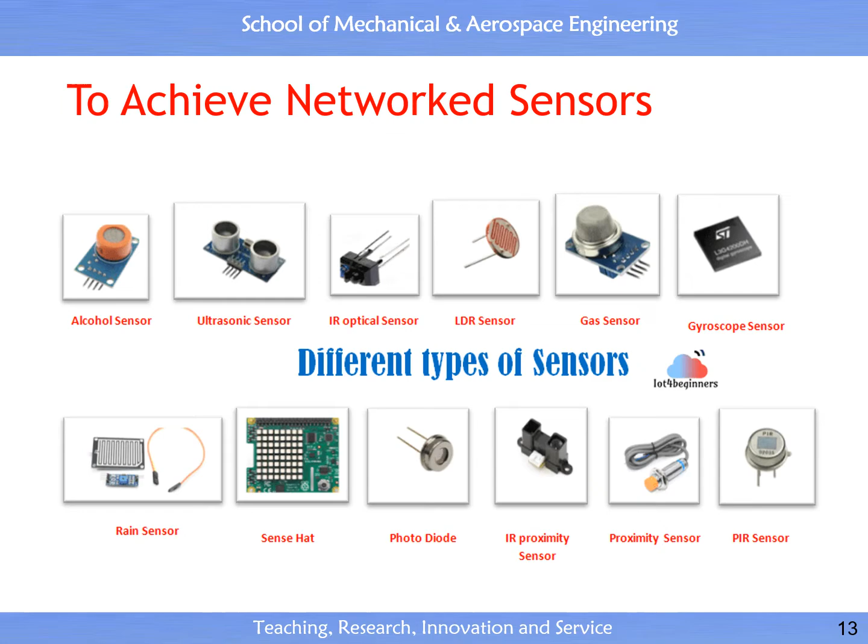There have been many revolutions, and now we're facing the next one: connectivity. But how can a company handle this? What does the industry of the future look like? Our experts have been wrestling with these questions for years. They know that the complete digitalization of the manufacturing industry plays a key role in the process. Why? That's simple. In the future, it will be more important than ever to operate quickly, flexibly, and cost-effectively.

Product life cycles are becoming increasingly shorter, while product variants are becoming progressively larger. Just like large volumes, small quantities must be produced economically. Lead times will become shorter, so delivery must become faster. For companies, this means that in the future, they must align their organization much more rigorously to meet customer needs. This can only be achieved if companies start today to digitize, automate, and above all, interconnect all processes, not only within the company, but also along the entire value chain.

This means a convergence of the various areas. Customers and business partners are part of the total process. The goal is to make all relevant data available anytime and be able to control the whole network of value creation in real time, from product planning and product and production development all the way up to production and logistics. Of course, data security must be assured at all times. Synchronizing digital and physical value streams not only increases productivity of companies, but also their efficiency, quality, and innovative capacity.

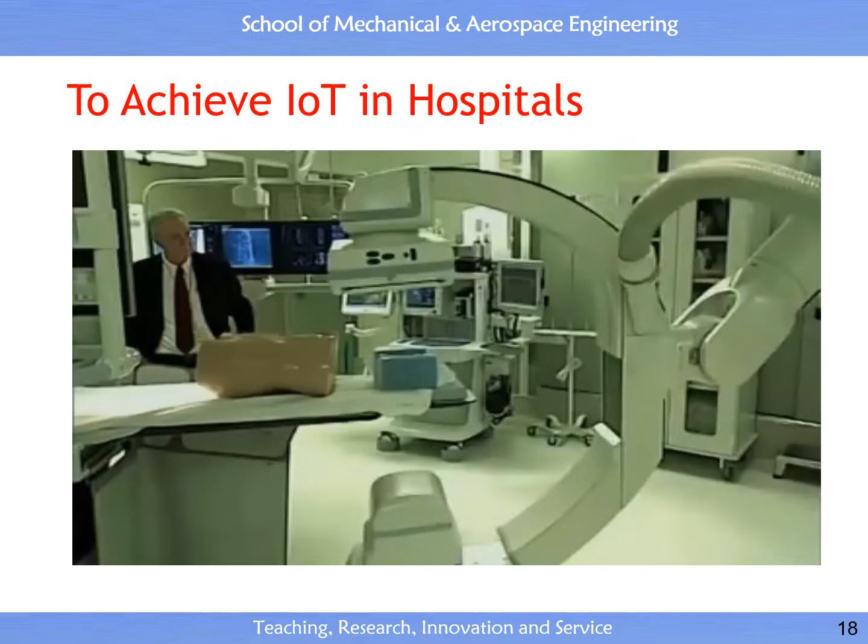We make no secret of the fact that we are determined to head right to the top of medicine. That's what we're doing - this is a beautiful example of it. I saw a machine that I'd seen 7 or 8 years ago in a lab building in Germany at Siemens, which was now a reality. And when somebody explained to me how it was going to be used, what more can you say?

We had this vision of what we thought the future of the operating room should be and what the future of surgery should be. Having an administration that was supportive of this vision, we were able to, with a lot of people's help, create these rooms, which are not only state-of-the-art operating rooms, but operating rooms of the future, where we're going to actually change what surgery is.

We're the first hospital in the country to have 2 of these units in the operating room. Just the whole concept of what is surgery, or what is needed to treat diseases, is changing.

We're going to redefine what a surgical specialist even is, because a surgical specialist now has to be an information technology expert. They have to be a radiologist, an endoscopist. They have to be able to do minimally invasive surgery. They've got to be able to do conventional surgery.

This revolution is really the merging of intervention with imaging—imaging equipment that allows us to be better surgeons and allows us to be minimally invasive surgeons. In this room, there are at least 12 different imaging devices so you can have multiple inputs.

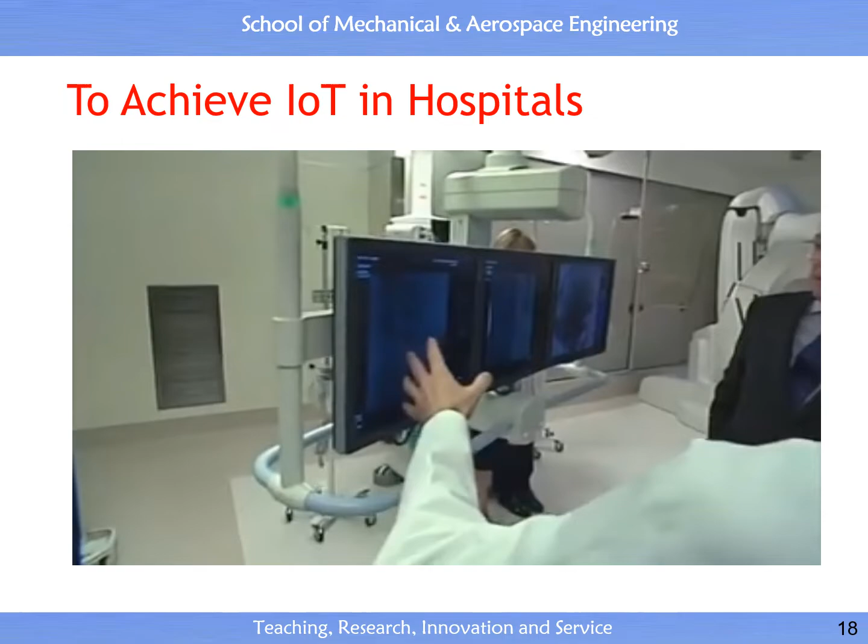You can always accomplish much more when you bring many minds from different disciplines together. That's really the exciting thing about being at an institution like New York Presbyterian. We couldn't have done this without the help of donors like the Helmsley Foundation, who helped mobilize the resources to build this kind of environment.

Basically, what this machine can do is take fluoroscopy and spin it around the patient to get a three-dimensional image. You can see blood vessels in 3 dimensions, solid tumors in 3 dimensions, and bone if you're putting in instrumentation and hardware.

By that spinning motion, you can also create cross-sectional images. So what you can start to do now is, say I'm going to operate on the intestine—this machine will give you simultaneously the intraluminal, or inside channel, picture, and I'm going to be able to see outside at the same time. This has the capability that we can overlay those images.

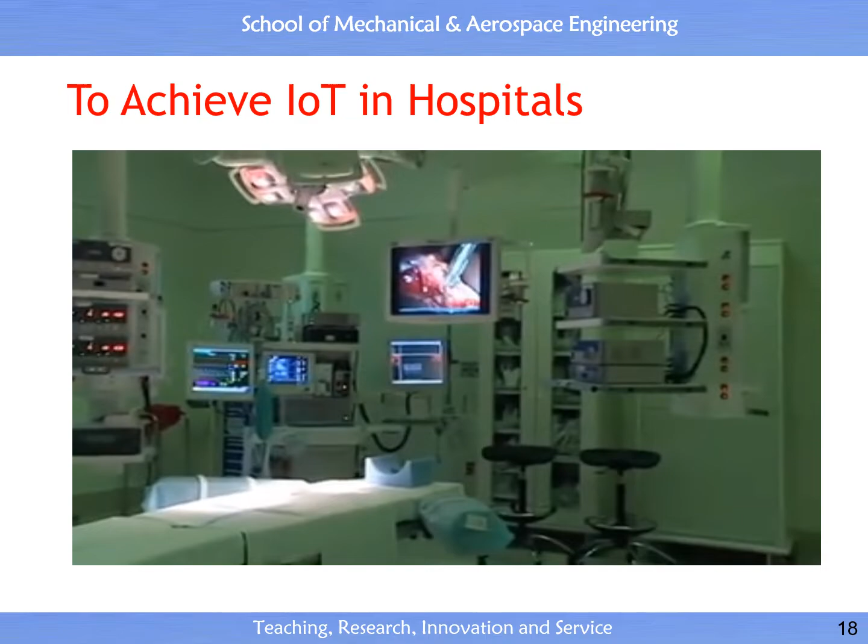So you can start to do what I was saying—think about intestinal surgery where the patient doesn't even have to go to sleep. The average patient nowadays is older, more frail, and has more serious accompanying diseases, so the possibility to eradicate their problem, minimize hospital stay, and minimize pain—that's what it's all about.

We really want to push the envelope a little bit, and when we start doing that, we don't know where we'll be able to go with this—I think that's really the excitement. The excitement is redefining what we're able to do, or what the standard of surgery is now, so that we can redefine ourselves and really change the way things are done.

To me, what it represents is not the state of the art—we're ahead of the state of the art.

70% of the world's population will be living in cities covering less than 2% of the Earth's surface. Never have cities been so challenged, and the trend continues to grow. This raises many issues: pollution, infrastructure access, traffic congestion, mobility, safety, and the health of residents are only a few examples.

The development and combination of new technologies, such as the Internet of Things and artificial intelligence, offer a multifaceted solution: the smart city. Smart cities are hyper-connected cities, technologically equipped to improve the lives of their residents.

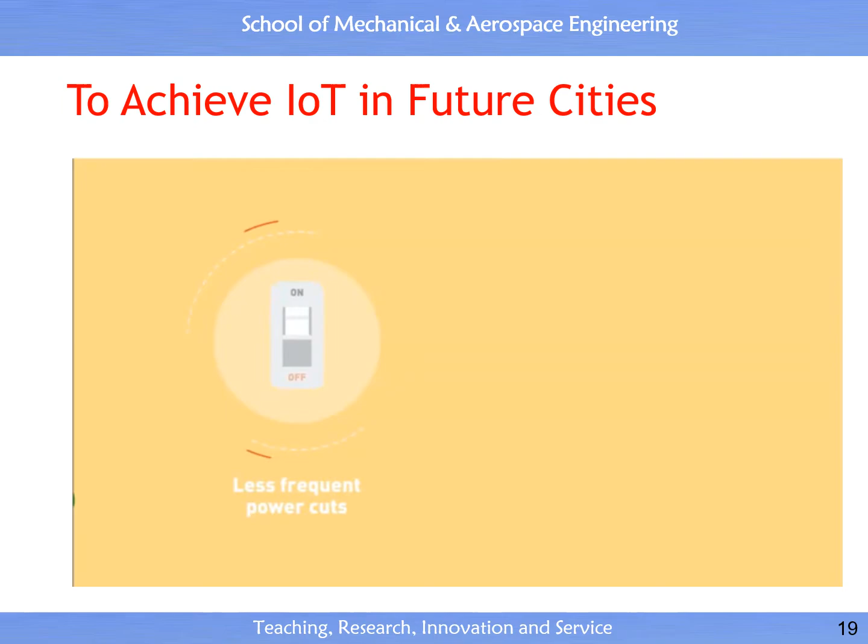In the United Kingdom, the city of Bristol created the Data Dome, a public platform where information on traffic, air quality, noise, or even the city's governance can be shared. They want to grasp the city's pulse by exploiting this data and give local players, citizens, and entrepreneurs the means to build the smart city that truly suits their needs.

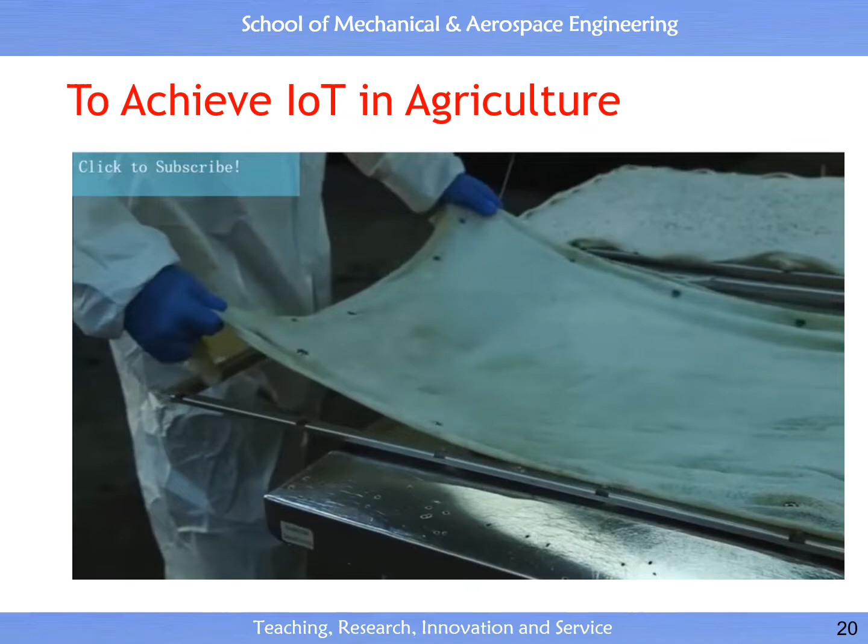They also use no pesticides or herbicides. Instead of soil, plants are grown in reusable cloth made from recycled plastic. And instead of the sun, there are rows and rows of specialized LED lighting.

A lot of people say, sunless, wait, plants need sun. In fact, the plants don't need yellow spectrum, so we're able to reduce our energy footprint by reducing certain types of spectrum. This sophisticated climate-controlled system cuts the growing cycle in half, so crops can be grown all year round, but with a much smaller impact on the environment.

There are all these stresses on our planet. 70% of our freshwater contamination comes from agriculture, and about 70% of our freshwater usage goes to agriculture. A third of our arable land has been degraded in the last 40 years. All these macro trends point to the fact that we need a new way to feed our planet.

One of the early champions of vertical farming is Columbia University ecologist Dickson Despommier. In 1999, Despommier and his students proposed that vertical farms could feed overpopulated cities while using less land and less water. They would also cut greenhouse gases by eliminating the need to transport food over long distances. And the idea is finally taking root.

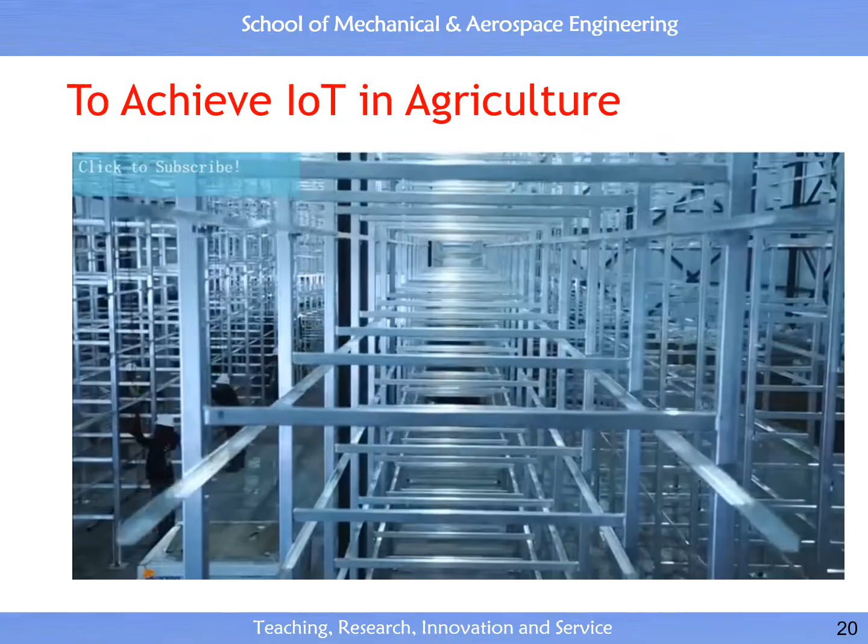Over the past few years, vertical farms have sprouted all over the world, including in Vancouver, Singapore, Panama, the UK, and around the US. Here in Newark, AeroFarms is building out another new farm in a former steel mill, one that's bigger than a football field. Once it's fully operational, it's expected to produce 2 million pounds of greens a year.

All grown vertically. We listen to the plants very carefully to try and understand what they're telling us and try to optimize all these different qualities of a plant. It's a tough business, but it's one that's going to stay and it's going to have a bigger and bigger impact.

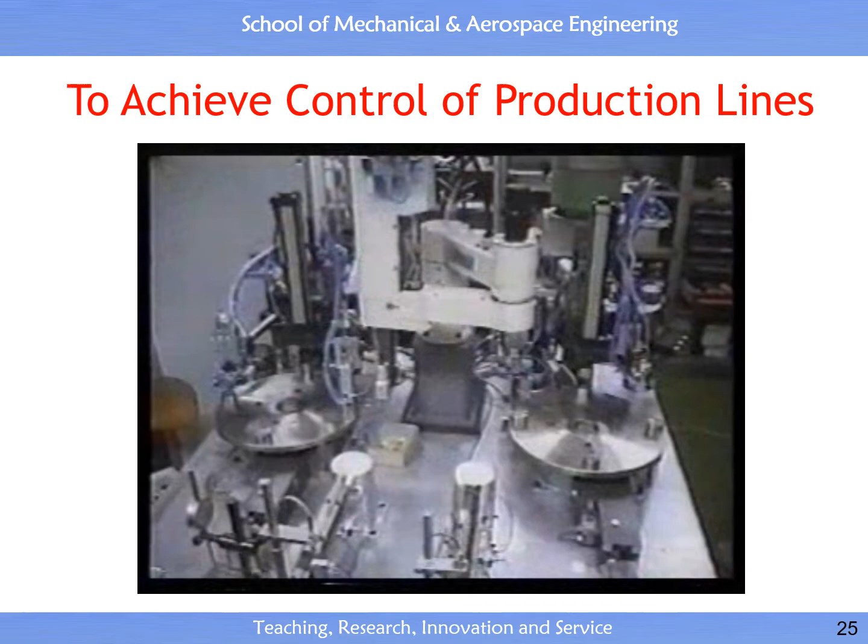Welcome to Adept Technology. I would like to introduce you to Adept Technology and to the world of robots, vision systems, and of course to vision-guided robots. Adept Technology is the leader in this industry of small parts assembly and handling with industrial robots.

Nearly 50% of the 3,000 installed Adept robot applications use an integrated vision system to ensure quality, flexibility, and a short return on investment. I think you will be surprised to see our robots handling, assembling, and inserting parts that you come across in your daily life, like candies, sausages, CDs, and all kinds of consumer products.

Adept Technology offers a complete line of robots that have reach, capacity, and production flexibility similar to manual operators, yet produce the consistent high-quality results of dedicated automation.

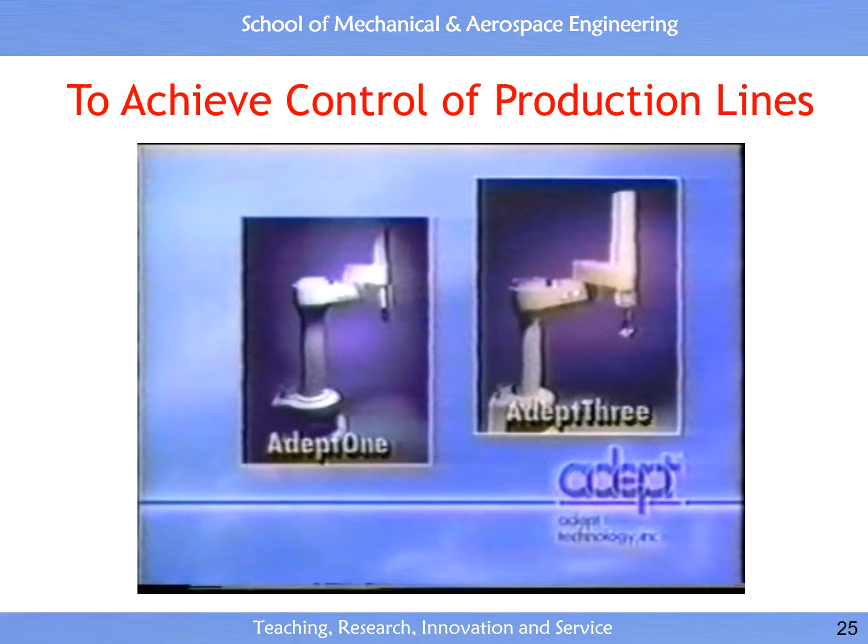The Adept 1 and Adept 3 robots utilize patented direct drive technology to deliver reliable, high-speed performance ideal for a wide variety of packaging tasks.

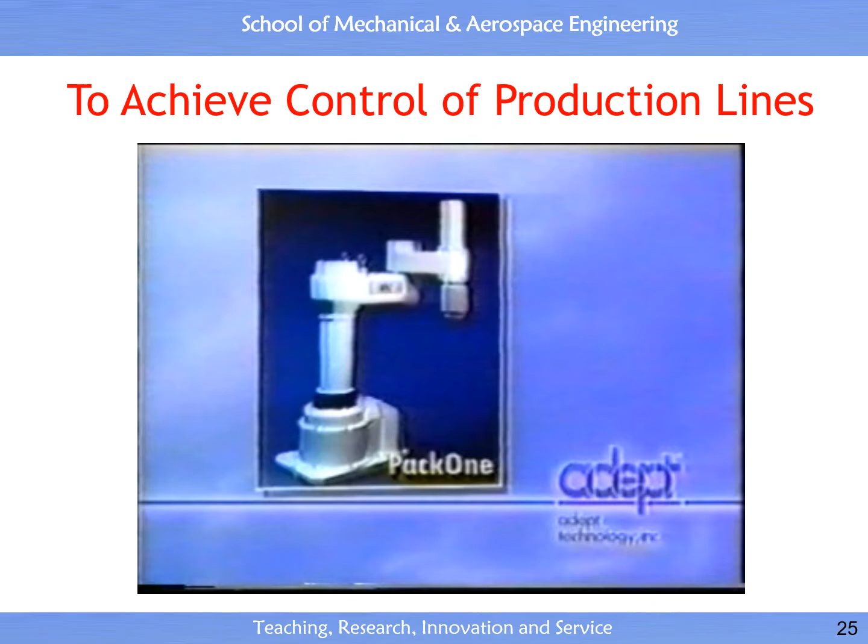With its compact work envelope and tabletop design, the Adept 604S robot is an economic solution for smaller, light payload jobs. And for packaging applications requiring sanitary washdown procedures, Adept's Pack 1 robot features a hygienic, environmentally sealed design that meets both USDA and European requirements for food handling equipment.

Let us get an explanation of the Adept philosophy in vision-guided robots from our chairman, Brian Carlisle.

Hi, I'm Brian Carlisle, chairman of Adept Technology. You've probably heard a lot about machine vision and know that the term describes almost any sensory equipment using cameras and analytical software. However, vision requirements vary greatly with the application.

At Adept, we believe strongly that one type of vision task, robot guidance vision, is the key to flexible manufacturing. We are encouraged that more manufacturers are using robot guidance vision in their operations. Adept's vision systems are reliable and cost-effective, and designed specifically for robot guidance, offering special capabilities that vision systems for other tasks cannot provide.

In this presentation, we plan to show you that robot guidance vision is now practical and can benefit your robot installation. For truly flexible, efficient manufacturing, what should you look for in a robot guidance vision system? There are three major requirements. First, robot guidance vision must not slow the robot.

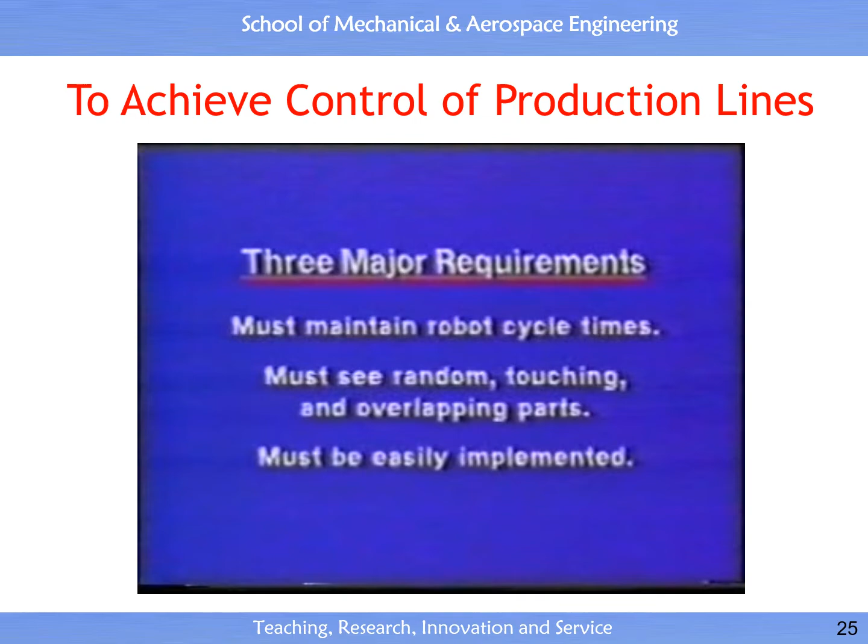Rapid data processing is important to maintain cycle times and throughput. Also, the system must handle randomly oriented, touching and overlapping parts, because that is how parts are generally found in factories. Finally, it must be easily implemented so your engineering time and costs are minimized.

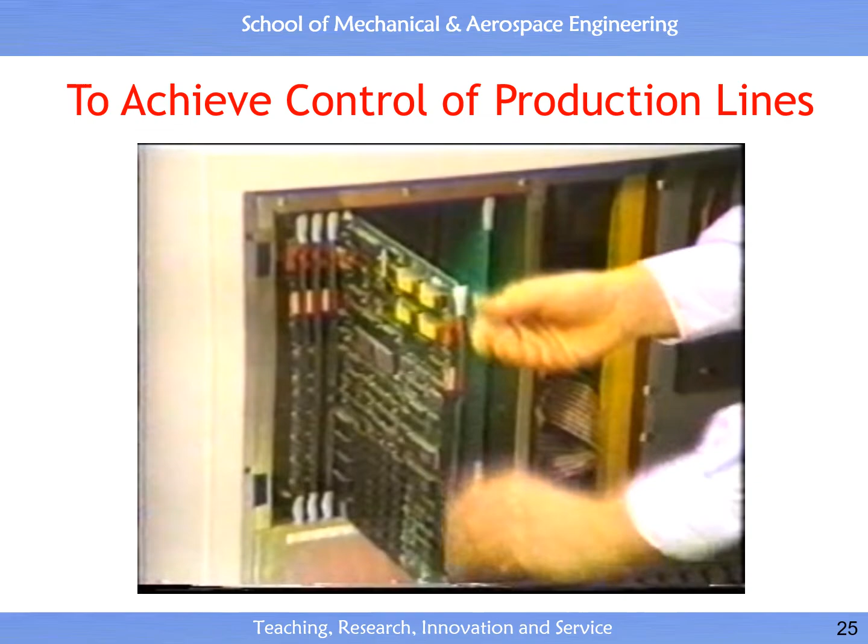For the first requirement, speed, two Adept Vision features give you rapid processing. The vision electronics in all Adept systems are housed in the same controller that drives the Adept robots. This way, the vision system and the robot system communicate through the multibus backplane. Most other systems don't communicate to the robot through a backplane and therefore require a separate vision controller. Because of Adept's integrated controller, communication is much faster.

Also, Adept Vision has its own dedicated Motorola 68000 microprocessor, so that vision data and robot data are processed in parallel. That means the robot continues its cycle while vision data is being processed, and when the robot reaches its destination, it can respond immediately to the vision information. Adept Vision's integrated communications and parallel processing provide timely information while maintaining rapid cycle times.

The second requirement for robot guidance vision is the need to handle randomly oriented, touching and overlapping parts. Adept's feature-based recognition technique makes this possible. By feature-based, we mean it locates the right combination of corners, straight line edges, and arc edges of a part, which it can find at any angle of rotation, even if parts touch or overlap, because as long as enough features are located, the system extrapolates the rest of the image and identifies the parts.

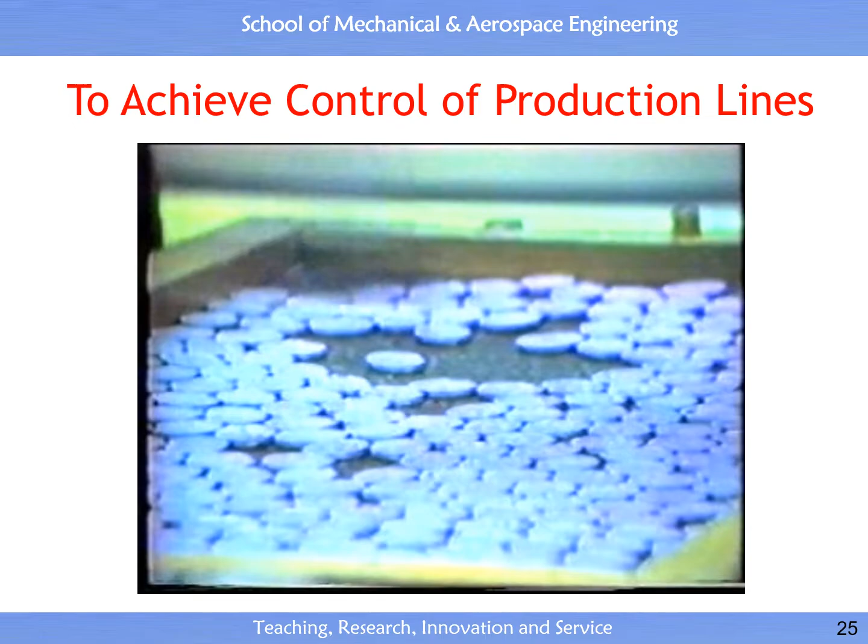This means you can present parts loosely and at any orientation in simple trays or on conveyors. Finally, robot guidance vision must be easy to install and train. Since Adept Vision is integrated into the Adept controller, implementation is simplified because you eliminate the need to design cables and connections for communication between a vision system and a robot with two separate controllers.

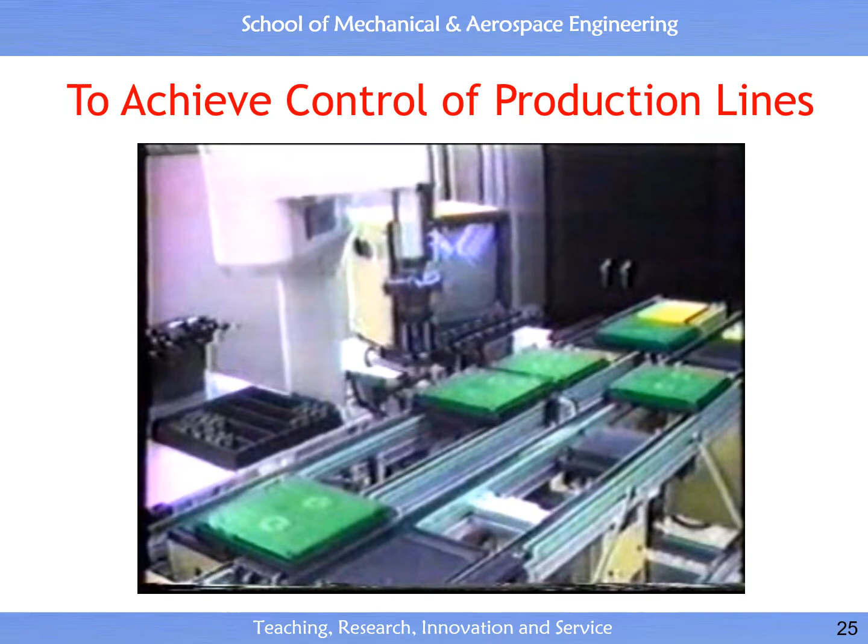You also eliminate the need to write software to communicate between the robot and vision system. Adept robots and vision systems already talk the same Val2 language, and you eliminate the need to write a calibration program to reconcile the coordinates of the vision and robot systems. Training is simple, too. Adept vision systems are designed specifically for robot guidance. They are fast, easy to implement, easy to train, and work reliably on the factory floor.

They simplify tooling and preserve the flexibility to handle a variety of parts. Robot guidance vision is ready and proven for the factory floor. It provides real benefits that give you an attractive return on your investment. These benefits include simplified part presentation, part verification and inspection, and most importantly, truly flexible manufacturing operations.

We at Adept welcome the opportunity to evaluate your manufacturing operations to help you determine where machine vision can be effectively applied. Thanks for watching.

While the concept of computer vision inspection might not seem terribly new, the combination of real power and real ease of use definitely is. That's where the Adept approach to vision inspection is finally making a difference between an emerging technology and one that delivers real manufacturing results.

Adept Vision AGS and our new VisionWare system is the result of that experience. Combining high-performance vision processing with an intuitive user interface, the Adept system makes vision inspection more cost-effective and easier to implement than ever before. To begin an inspection, parts can be analyzed in either grayscale or binary modes, and images can be acquired from stationary parts or rapidly moving production lines.

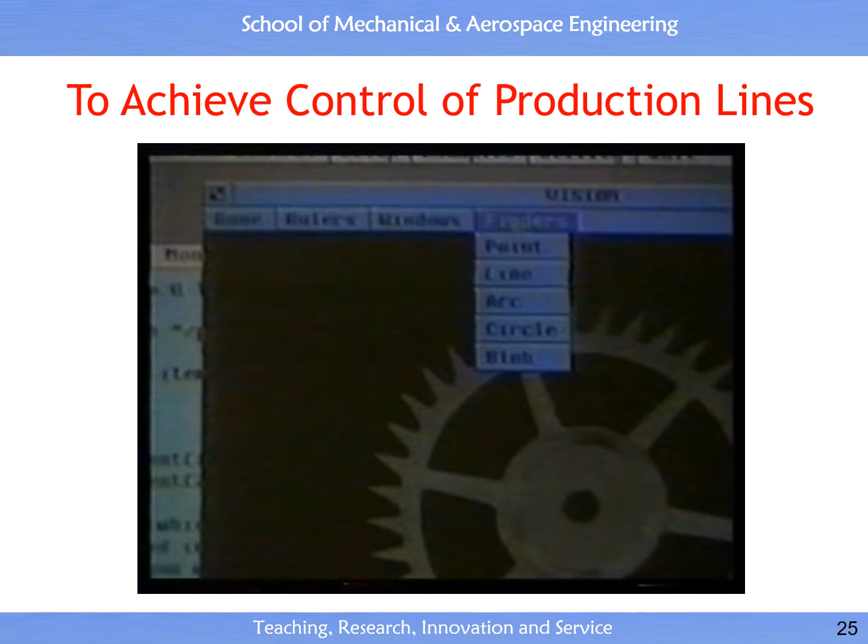Once an image is acquired, all the necessary tools for vision analysis are available via simple pull-down menus. Other tools, such as optical character recognition, can be used to verify print quality and automatically track information such as lot codes and serial numbers.

Adept's feature-based recognition tools allow the system to recognize and inspect even randomly oriented parts, making it easier to apply the system in a real-world manufacturing environment.

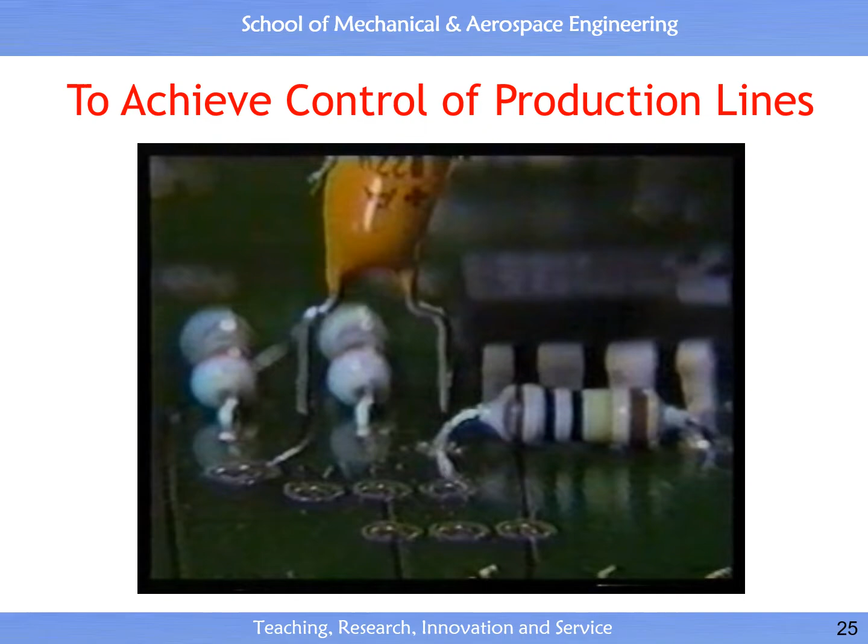In the next few minutes, we will show you some of the major application areas for Adept robots and vision systems. The first part will cover the electronic industry. The second, very interesting area, is packaging using industrial robots.

The last part will give you an impression of the sophisticated area of mechanical assembly and parts handling.

In today's complex world, the challenges of advanced technology, compounded by competitive world markets, have made robotics a virtual necessity for competitive electronics production.

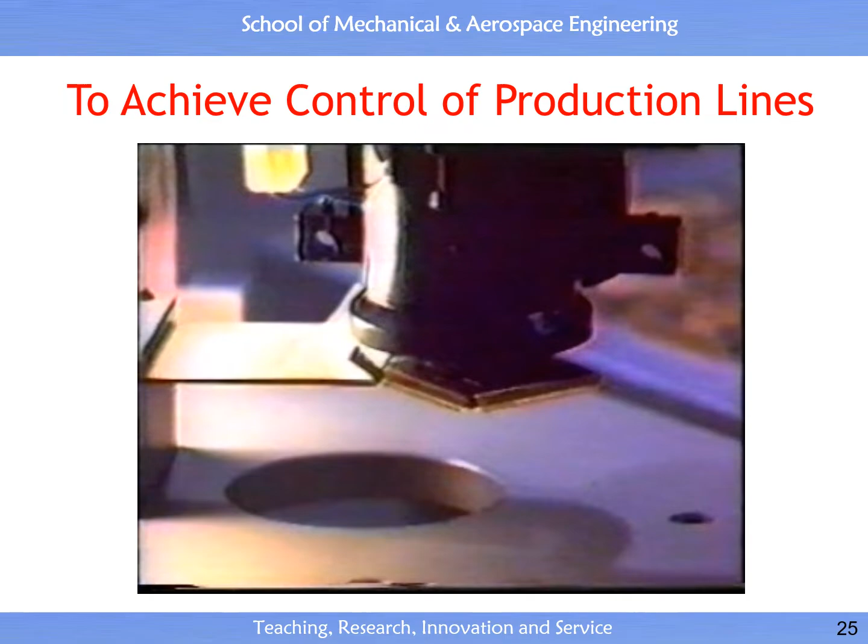As a world leader in high-performance robot and vision systems, Adept Technology has gained a unique perspective on the use of flexible automation throughout the electronics industry. In this videotape, we'd like to share a first-hand look at how today's leading electronics firms are using today's most advanced robotic systems.

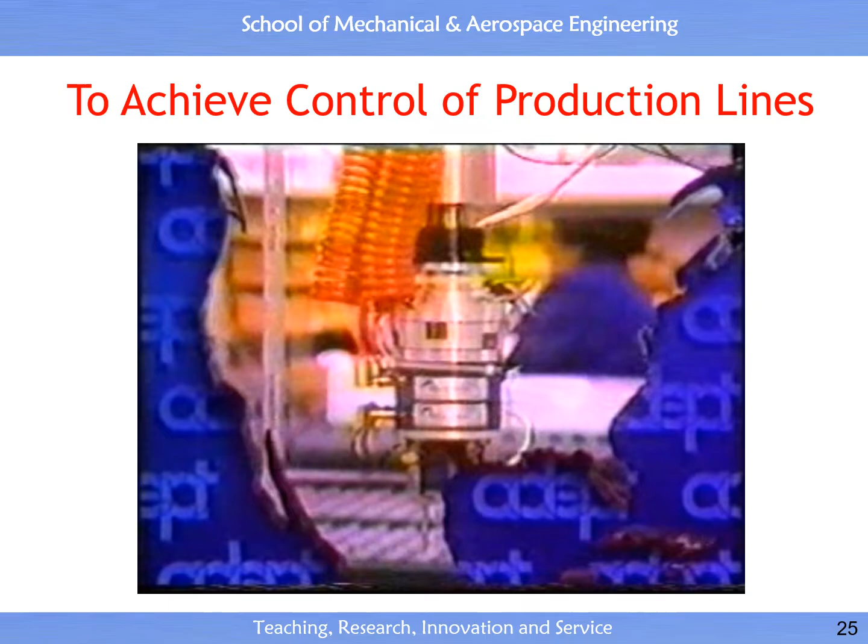Around the world, makers of high-tech electronic products are being challenged to improve quality, increase flexibility, and boost the bottom-line effectiveness of their manufacturing operations. For a growing number of firms, including world leaders in the computer, defense, and telecommunication industries, Adept Technology's flexible robot and vision systems are helping meet this manufacturing challenge.

We invite you to join us as we tour state-of-the-art robotic production facilities at Control Data Corporation, Digital Equipment Corporation, and the Xerox Corporation.

At Control Data Corporation's Computer Systems Manufacturing Division, just outside Toronto, Canada, this vision-assisted robotic workstation assembles surface-mount circuit boards for CDC's high-end mainframe computers. Designed and built by Gelser Systems Company of Westerville, Ohio, this robotic solution offers greater flexibility than dedicated equipment and provides higher, more consistent quality than manual production techniques.

While the robot arm is the most obvious part of the workstation, the system is actually a network of hardware and communications channels driven by custom software run on the powerful Adept controller. This multitasking controller coordinates part feeders and automatic tool changing to allow the robot to locate and acquire over 128 electrically unique surface mount components.

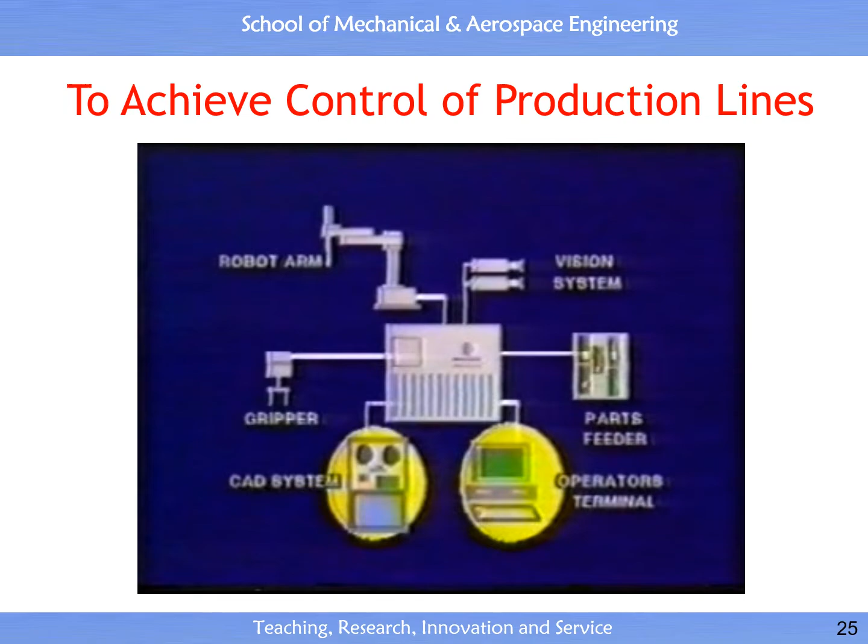To determine which components are needed for a given board design, a CAD-generated database is downloaded to the robot controller. Placement locations for individual components are given relative to fiducial marks on the board artwork. Once these are sighted, the system automatically calculates precise coordinates for hundreds of placement locations. Using this capability, production may be quickly changed from one board type to another without reprogramming or mechanical adjustment.

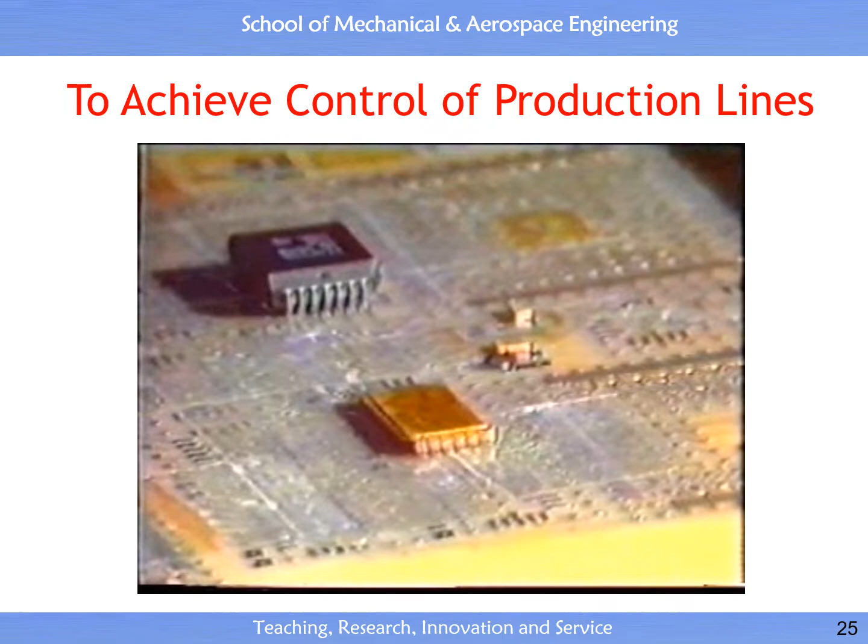During assembly, an Adept Vision system uses a total of 4 cameras to guide the robot through acquisition, inspection, and placement of over 20 different component types, ranging from very small discretes to the fine-pitch 172 lead quad pack.

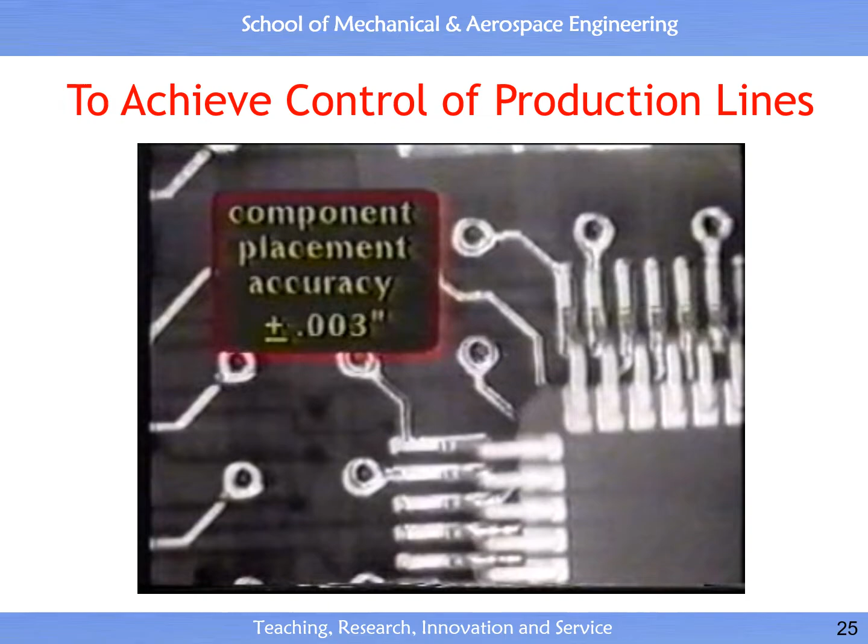For this component, fine tolerances dictate an additional visual check of the placement location. Inspection of quad pack leads ensures part integrity while indicating alignment relative to the robot arm. Using this information, the final result for CDC is component placement accuracy within 0.003 of an inch.

As surface mount technology spreads throughout the electronics industry, this kind of consistent quality, combined with unprecedented production flexibility, is only one reason innovative firms are choosing Adept solutions for their manufacturing operations.

The solution, developed by Digital's Advanced Manufacturing Technology Group and the Shuttleworth Corporation, is a completely flexible, computer-controlled production facility. Here, an entire family of tape and disk drive products are produced by a system of interchangeable manual and robotic workstations. At the robotic workstation, a barcode reader and a grayscale vision system identify incoming components before they're assembled by a 2-robot system. Once the system verifies that all needed parts are available, the assembly process begins.

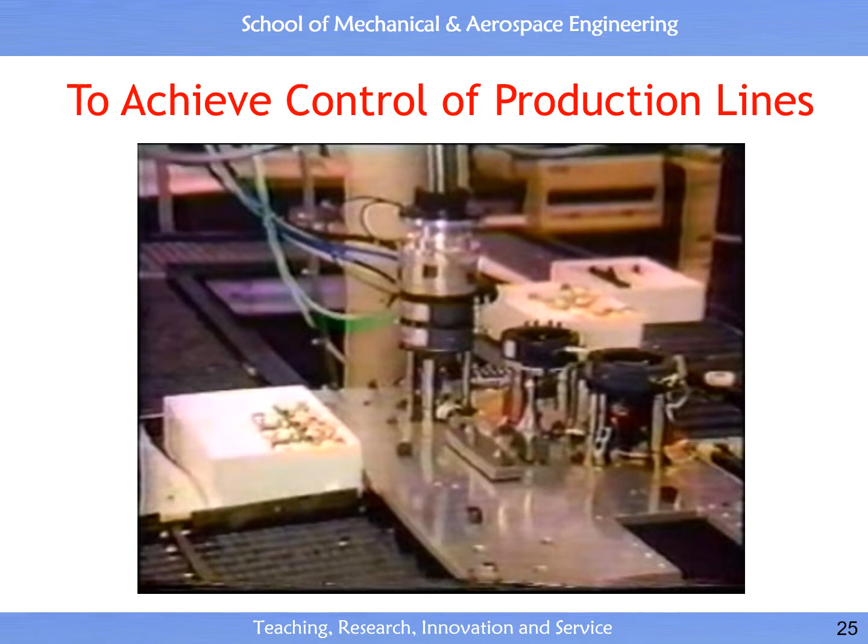During assembly, the robots use interchangeable end-of-arm tools to perform a wide variety of assembly functions. For instance, one robot uses a special gripper to acquire and position electric motors in the tape drive mechanism, while the other robot uses an automatic screwdriver to complete the assembly operation.

Throughout the entire process, the robots are in constant communication with each other to assure efficient, coordinated assembly of 14 total parts. According to Digital, flexible automation has already paid off with the fastest production ramp-up of any storage product in their history. In addition, the Springfield facility has reached a level of quality and production efficiency that makes it competitive on a worldwide basis.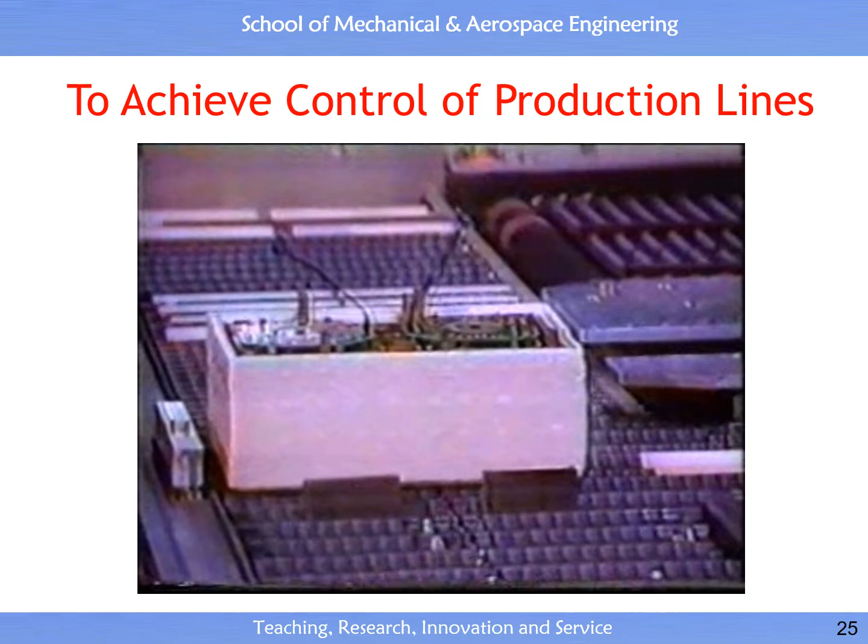As a result of this success, Digital is adding more robots to the Springfield operation and has already chosen Adept solutions for manufacturing applications at other Digital facilities.

While the installations of Digital equipment and Control Data show how robotic solutions contribute to new production systems, the experience at Xerox Corporation shows how Adept robots can also work to improve existing manufacturing operations. Here at Xerox's El Segundo, California facility, millions of printed circuit boards are produced each year for the Xerox line of office products. To maintain its competitive position, plant management must constantly find new ways to achieve world-class quality and production efficiency.

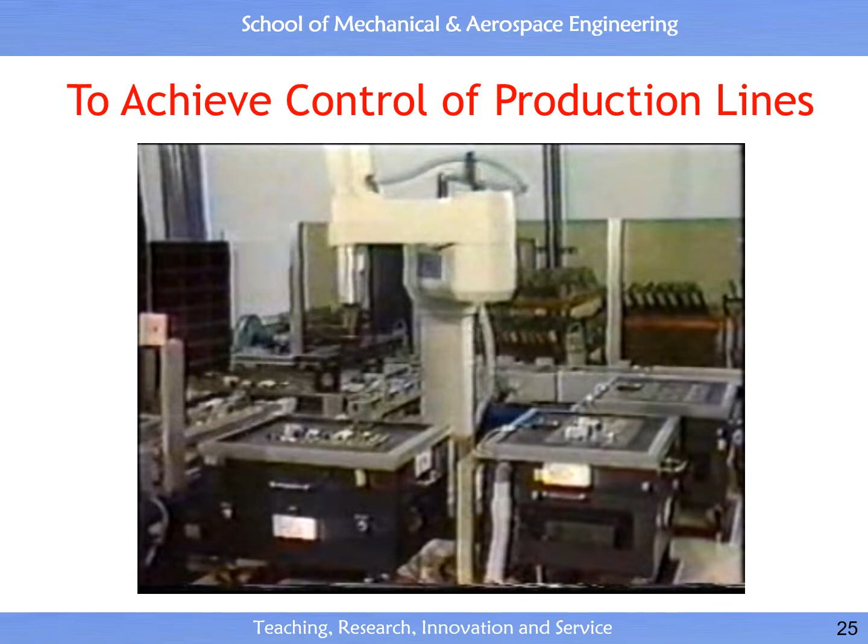Recently, Xerox took advantage of two opportunities to improve manufacturing effectiveness with Adept robotic solutions. We've had two systems installed in our facility, a test cell installed in April of '86. That test cell has been an extremely successful system, in full production, running close to 800 boards per day through it with almost zero problems. The Adept robot has performed beautifully for us.

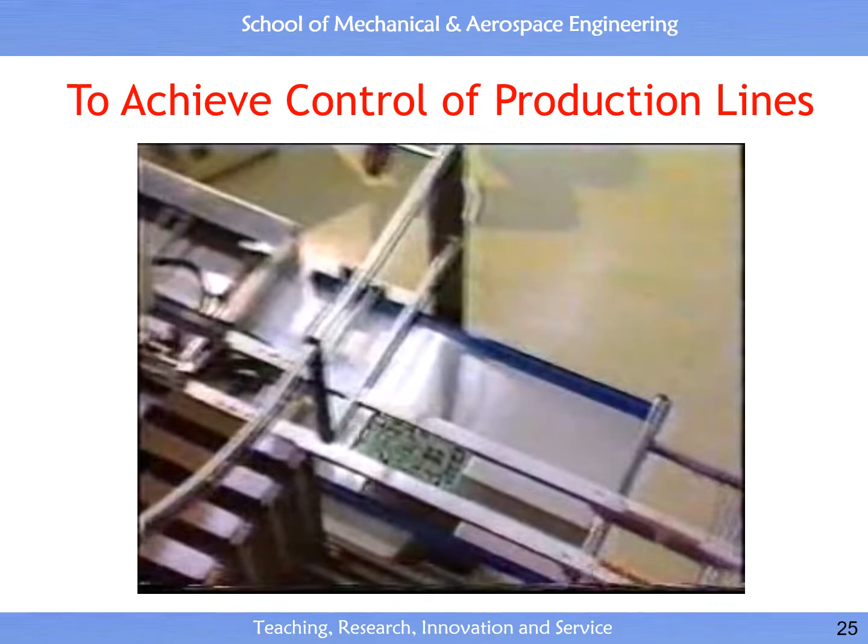In November of this year, we finished the installation and started production in a 3-robot insertion cell. Since that time, that cell has also performed to a high level of productivity for us. The second installation, also designed by Chad Industries, is a series of 3 robots inserting odd-form components onto partially completed printed circuit assemblies.

The first work cell uses a single robot to place connectors and other components with high lead integrity. Parts are acquired from linear and vibratory bowl feeders, and immediately after placement are secured by an integrated lead clinching system. A compliant wrist on the robot's arm confirms a component has been successfully placed. Or when a bent lead or other problem prevents insertion, the robot senses the error, discards the part, and begins the process again.

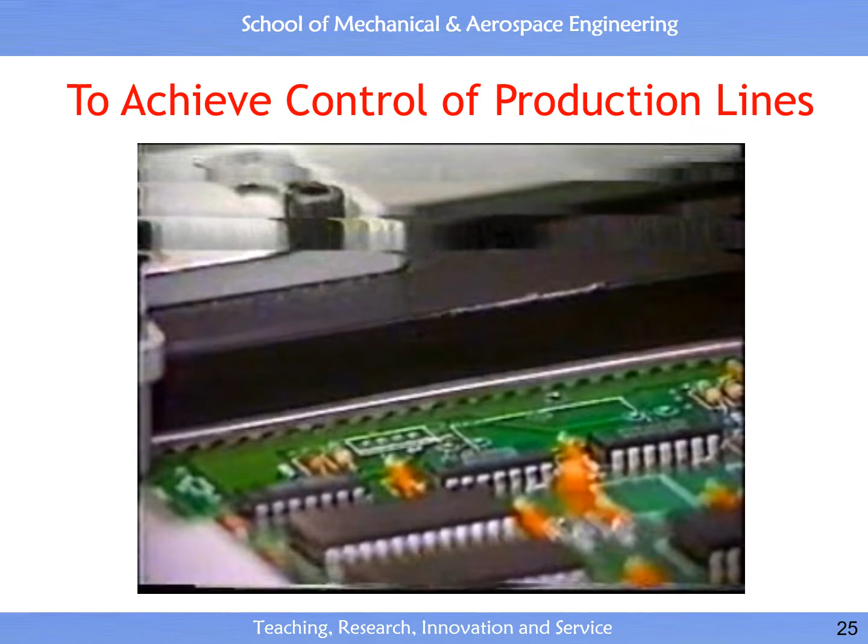Placement rates for the cell average 12 components per minute and support production of 66 boards per hour, 3 shifts a day if required. Depending on board design, the single cell places up to 14 different component types before sending the board to the dual robot workstation.

Both Xerox insertion cells operate using a software package called AIM, developed by Adept to simplify robot implementation and operation. AIM keeps track of feeder locations, component status, and other information required to manage the assembly process. We purchased the entire robotic system from a systems house, and the systems house modified the AIM software for the features that they added to the cell.

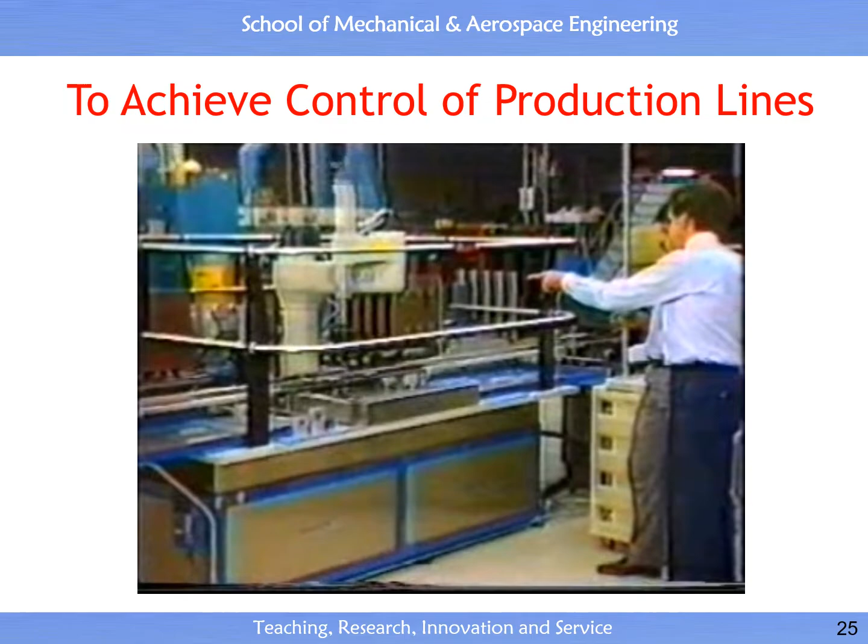And now that we've had that in our shop running, we've also taken the software. We have taught new boards, entered new programs into the system. One of our maintenance operators does that very frequently and finds it very easy to work with and very easy to add new boards and new components to the cell.

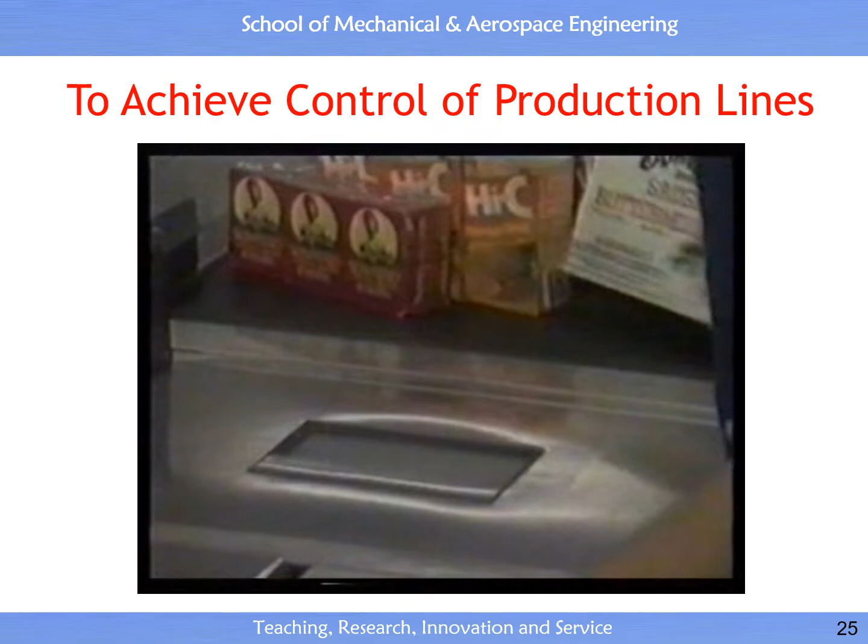In today's competitive market, product packaging is playing a more important role than ever before. Changing package designs, frequent product introductions, and shorter times to market are causing manufacturers worldwide to re-examine their approach to the packaging process. In the past, manufacturers could rely on traditional packaging technologies such as dedicated machinery and manual production techniques.

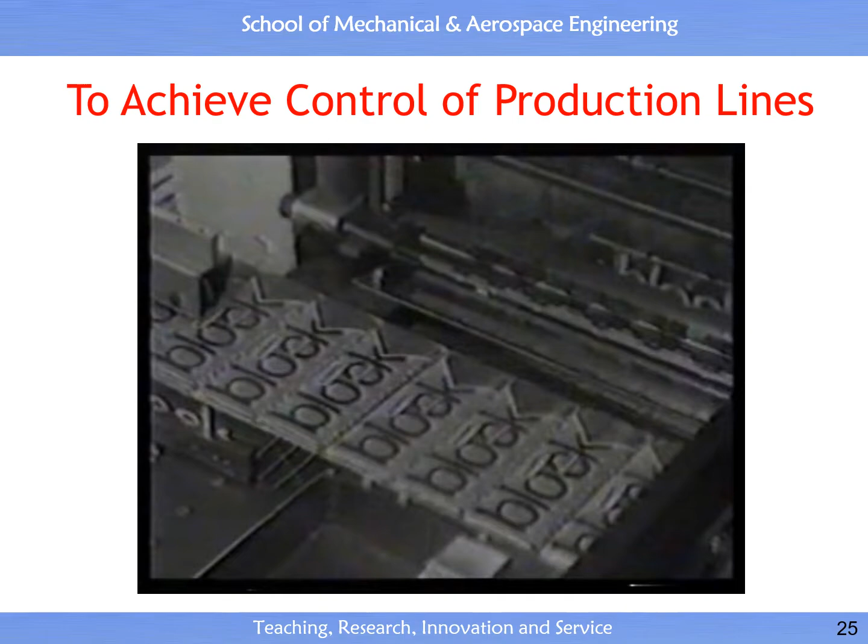But dedicated equipment cannot always meet today's needs for increased production flexibility. And with higher labor and liability costs, manual alternatives are not always a competitive solution. Now, there is a new choice in packaging technology, an automated solution that actually duplicates the hand-eye coordination of manual operators to replace touch labor in the packaging process. The choice is flexible automation from Adept Technology.

Join us now as we look at Adept packaging solutions for case packing, candy, convenience food, bakery, and meat handling operations.

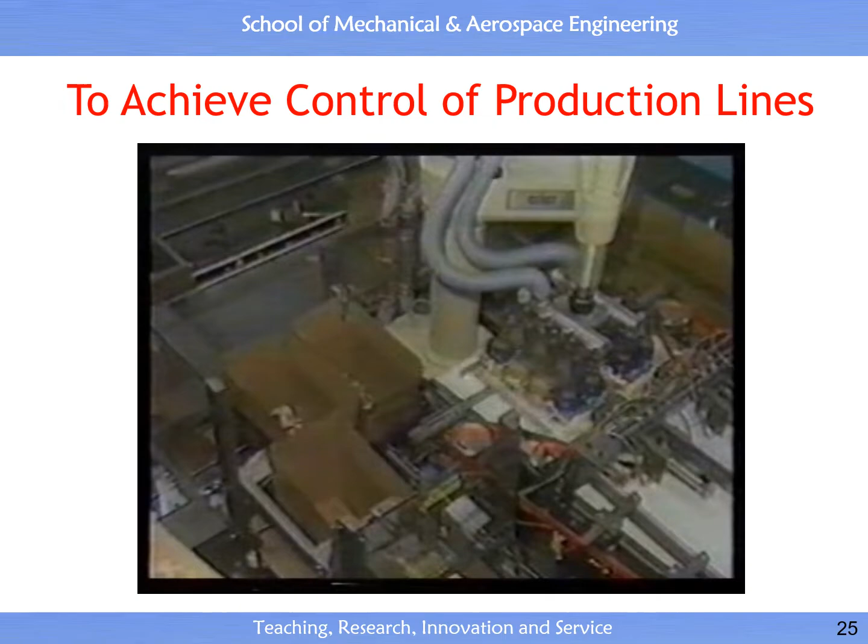For case packing applications, the Adept solution provides manufacturers with an unprecedented level of process flexibility. Using Adept robot systems, staged product can be gently packed in a wide range of configurations with reliable speed and precision. And with the addition of Adept Vision for product identification and tracking, the system can easily handle even a randomly spaced product flow.

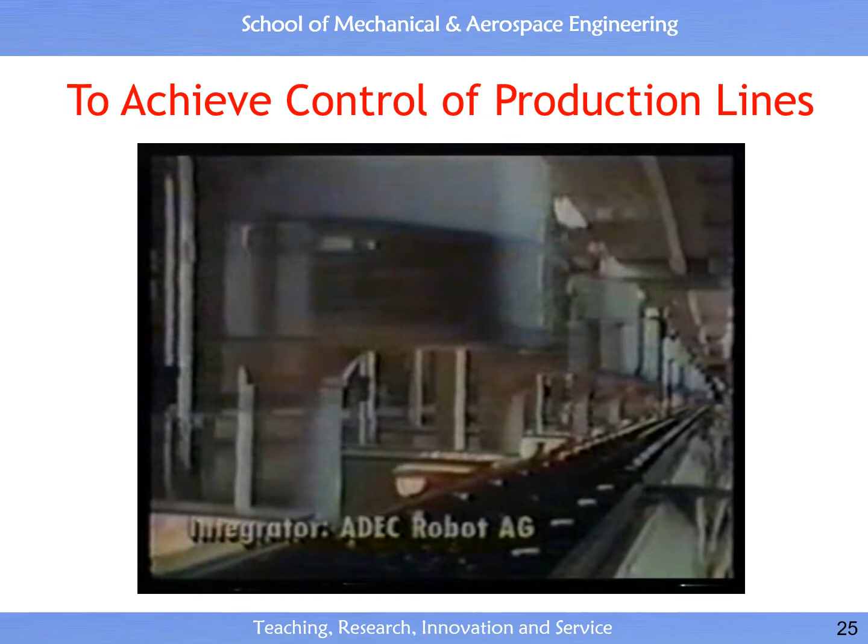For producers of fancy candies, the Adept approach provides a high-speed yet delicate packaging solution that locates, inspects, and places candies on a moving line. Adept Vision allows each system to recognize a candy's shape and position, while the line tracking capabilities of the Adept controller ensure precise candy placement.

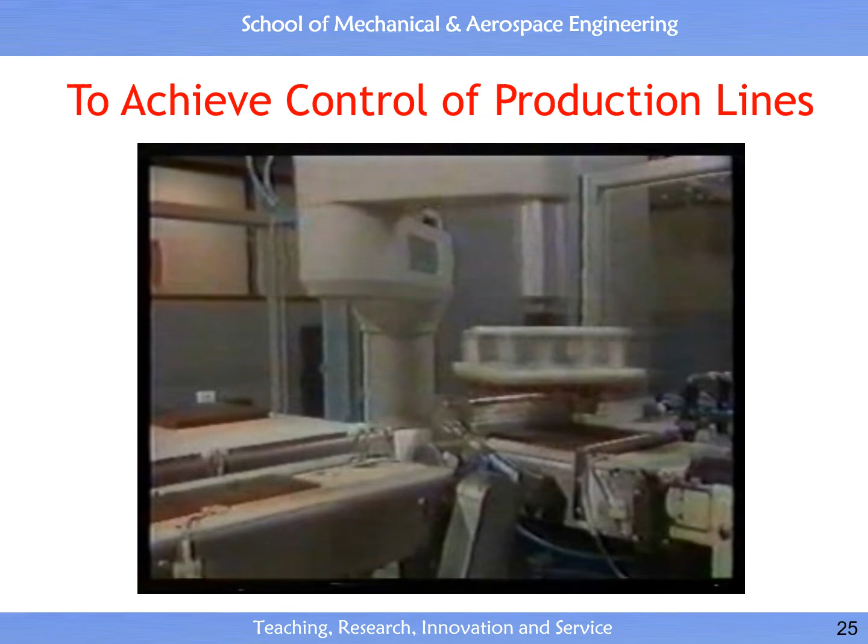And since system changes are made in software, the entire line can be converted from one assortment to the next in minutes. For increased production rates, Adept robots can be equipped with multiple pick grippers. And with powerful automation controls, Adept systems can link asynchronous processes by accumulating product when the downstream process is stopped and reintroducing it when production allows.

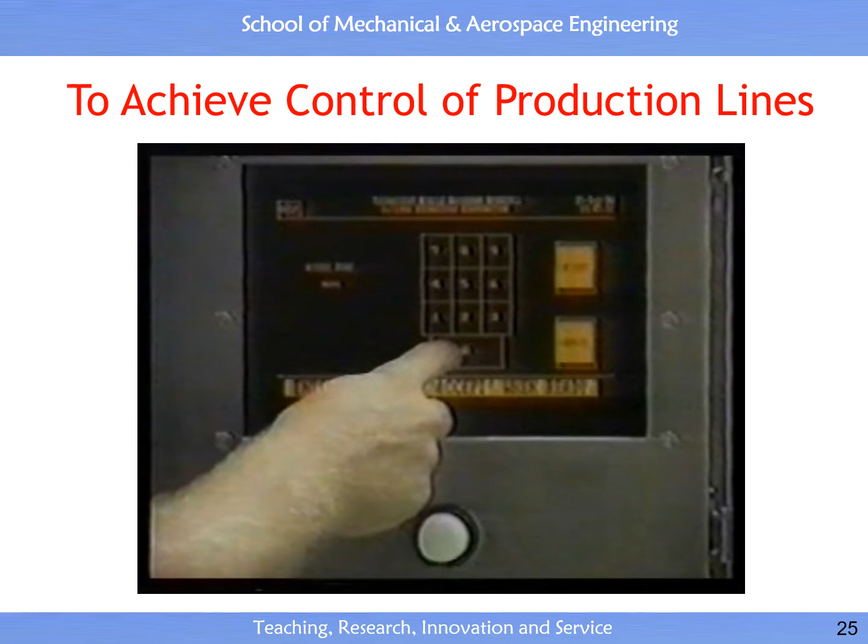In the convenience food industry, many production operations also require product assembly. In this application, Adept systems recognize component locations and assemble product directly on a moving line. Since Adept systems are completely programmable, many assembly options are possible, including the placement of individual portions into serving trays.

Bakery applications for Adept robot systems include picking product from an oven conveyor and assembling complex package arrangements.

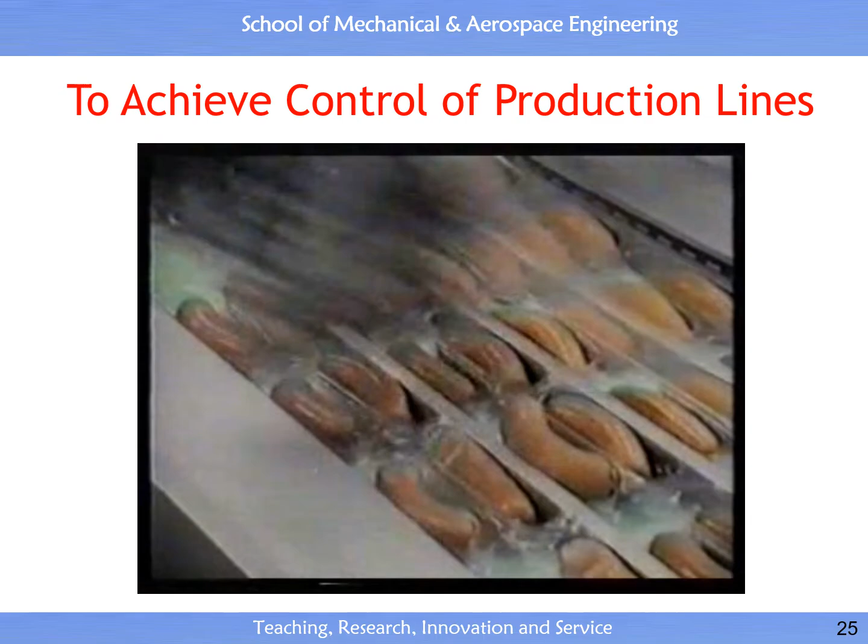In our first presentation of a flexible manufacturing robot cell, an Adept 3 robot assembles two different products in one work cell. All parts needed are transported into the cell via conveyor, which is connected to a flexible palletizing system. Using the gripper, the robot assembles a sub-assembly for a vacuum cleaner. The assembly of the second part begins.

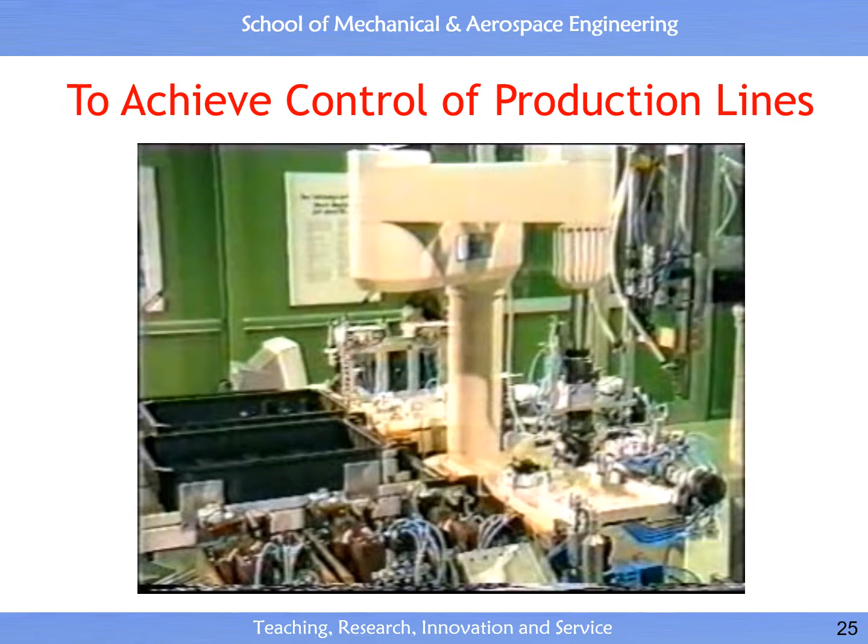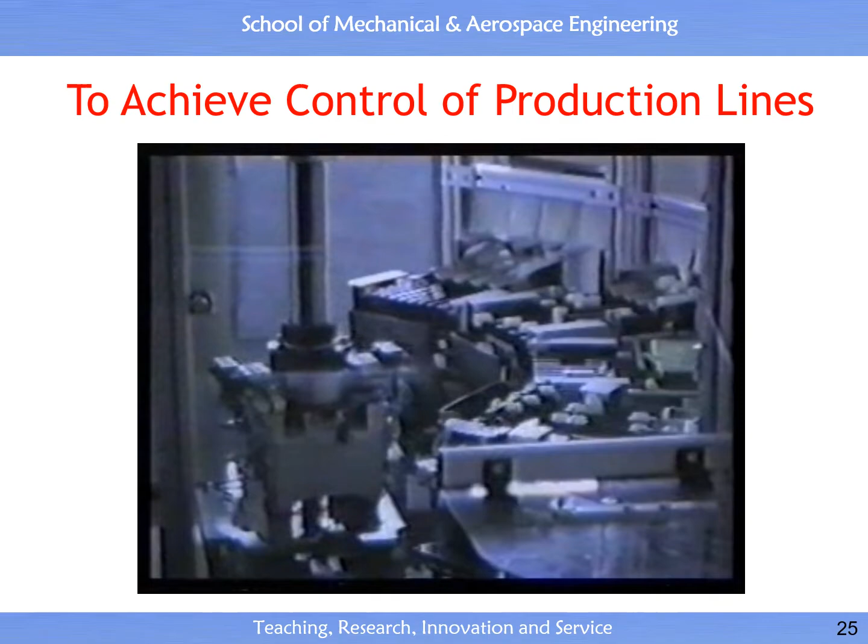Nasal sprays come in large varieties. These ones are assembled in this flexible, vision-guided robotic work cell. An Adept 1 robot with an integrated vision system using 4 cameras and a sophisticated multifunctional gripper assembles and tests one nasal spray consisting of 6 parts within 10 seconds. A high level of flexibility is achieved through the use of a vision system to guide the robot to the location of the parts. The part feeders are capable of handling a large variety of different sizes without any mechanical adjustment.

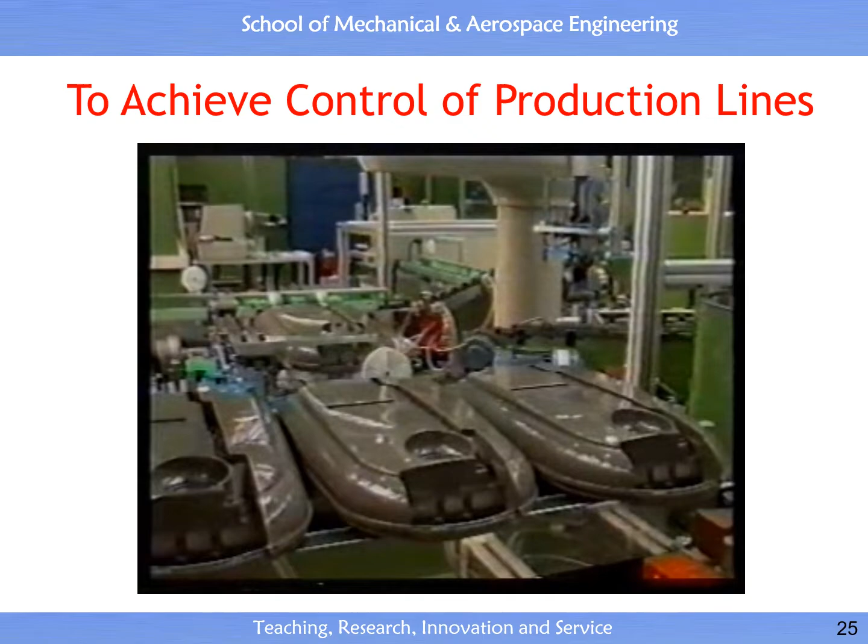Using an Adept 1 robot with a multifunctional gripper, the rollers are assembled to the underbody of a vacuum cleaner. The Adept 1 robot is able to handle all parts necessary in this work cell.

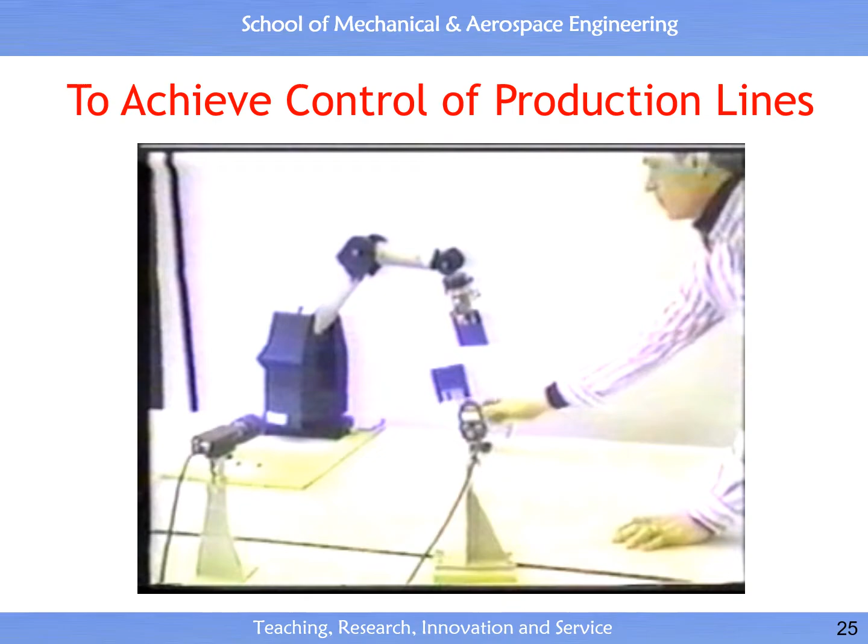Specially designed image-based regulators support a variety of positioning modes, including 3 degree of freedom point positioning, 4 degree of freedom collinearity constraints, and full 6 degree of freedom relative positioning. The accuracy of these methods is on the order of a millimeter in depth. One advantage of these methods is that their accuracy is not sensitive to calibration, as shown here when we move one of the observing cameras while the system is in operation.

By reconfiguring the tracking slightly, the same feedback methods can be used to place a screwdriver on the head of a screw. Using a 4 degree of freedom collinearity primitive, the screwdriver is first aligned with the screw. We then superimpose a motion along the alignment axis to move the screwdriver downward until contact. For reference, the head of the screw is 6 millimeters in diameter.

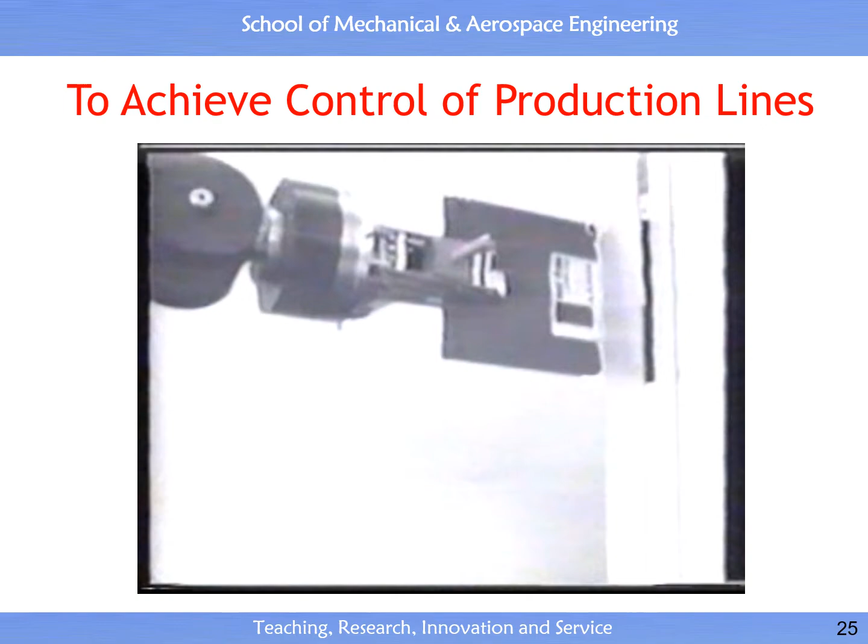Similarly, tracking and control are easily reconfigured to insert a floppy disk into a disk drive. This utilizes a 5 degree of freedom regulator composed from a 3 degree of freedom positioning primitive and a 2 degree of freedom alignment primitive.

Future research will be devoted to handling visual occlusion, vision-based planning, hybrid feedback using vision, and vision-based programming environments.

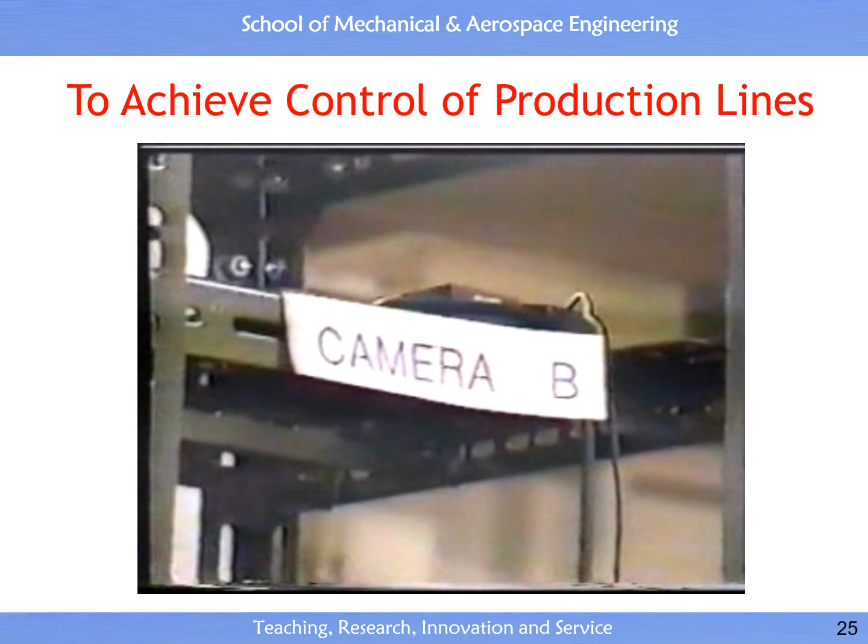We have developed the Hanetsuki robot. Hanetsuki is a traditional Japanese badminton, and here we think of a task to return an incoming ball with a racket. The immobile robot has to return a ball to the human opponent with a racket. The system uses 2 perpendicularly fixed cameras, camera B and camera A, to attain the trajectory of the ball. This red ring is a nearby area of a target where the ball must return. A 5 degree of freedom robot and parallel processing board is used in this system.

This scene shows robot practicing to hit the ball. The aim of this task is to return any kind of ball to the target. We employ a learning algorithm to sophisticate the action commands. The learning algorithm used in this system consists of updating and smoothing action commands. By implementing this algorithm, we could compensate for the insufficiency in a model-based approach.

As a result, the robot could play Hanetsuki with a human. There is no other robot that could perform the Hanetsuki task as good as this robot.

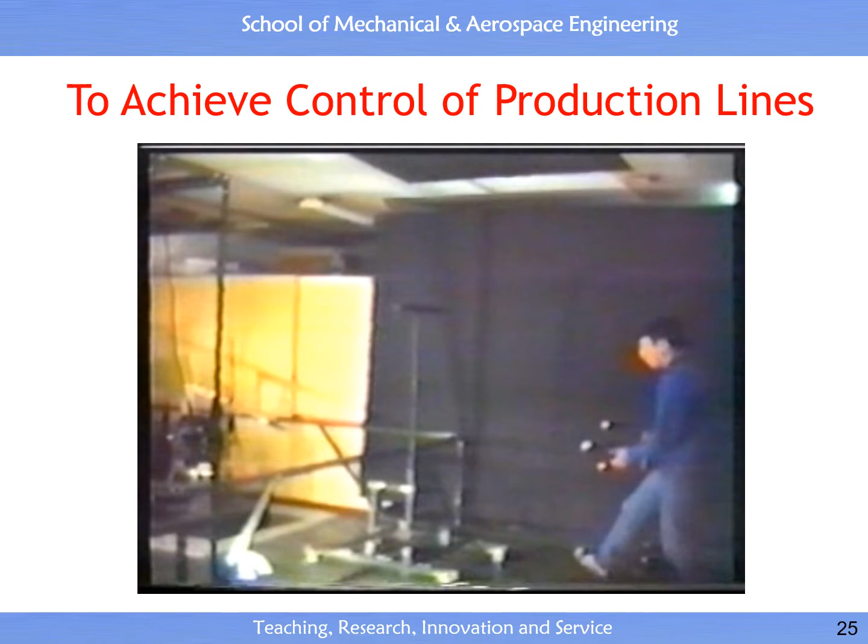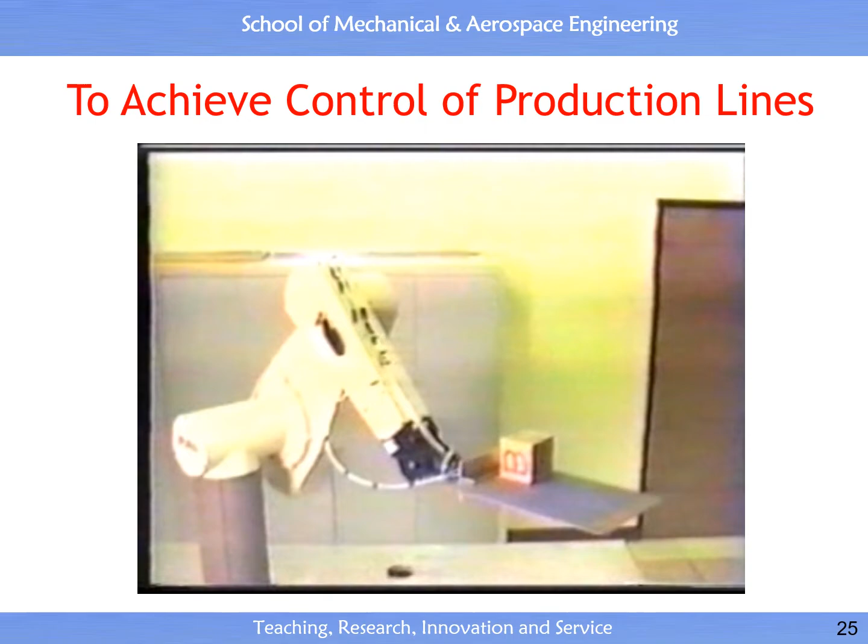This experiment is an example of dynamic skill in which the inertia of the object is utilized for manipulation. After the object is released from the paddle surface, it is supported by the contact edge. The rotation of the object and the motion of the edge are dynamically coupled through the inertia of the object. The edge is considered as a passive joint, and the object rotation is controlled by using this coupling.

We plan the trajectory of the arm based on a dynamic model of the object, and the trajectory is simply executed in an open loop. Such dynamic skills will enable a wider variety of manipulation tasks compared to conventional kinematic skills. In addition, some tasks can be accomplished faster, and heavier or larger objects can be manipulated by this approach.

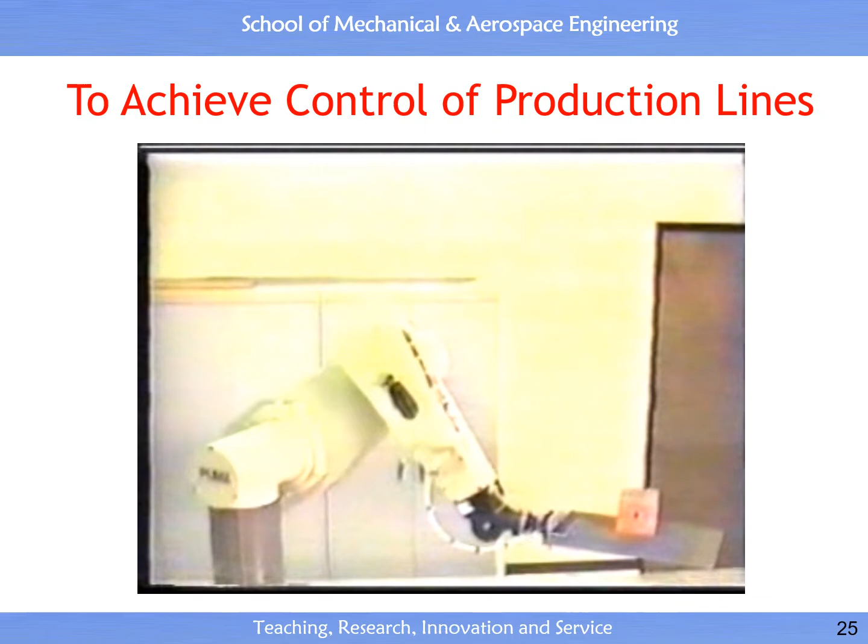We have developed a prototype robotic work cell that integrates online planning and real-time control. This work cell can perform complex multi-step tasks autonomously. Typical applications of this work include rapid deployment assembly workstations with flexible part feeding.

In this simulated environment, the pink represents goal locations and the black obstacles for the parts. Parts are fed in random order at any time. The obstacle and goal locations can be changed online, and the changes will be reflected in the subsequent paths. In this experiment, 2 manipulators are used to perform several operations, including dual-arm object captures from a moving conveyor, motion among obstacles, regrasps, and handovers.

A unique feature of this system is that the different subsystem modules, such as the planner, robot controller, and graphical user interface, are distributed among different computers and communicate through a local area network.

The desired goals are indicated by the color paper on the table. All objects are tracked by an overhead vision system.

When a new part appears on the conveyor, the planner is notified and generates a capture trajectory in fractions of a second. The robot control subsystem follows the trajectory until the arm is close to the part. The final intercept maneuver is performed by the robot control system autonomously under direct vision feedback.

The planner generates capture trajectories using the object velocity estimated by the vision system. The initial overshoot in capturing the golden part illustrates that an inaccurate initial estimation can be corrected during the final intercept maneuver.

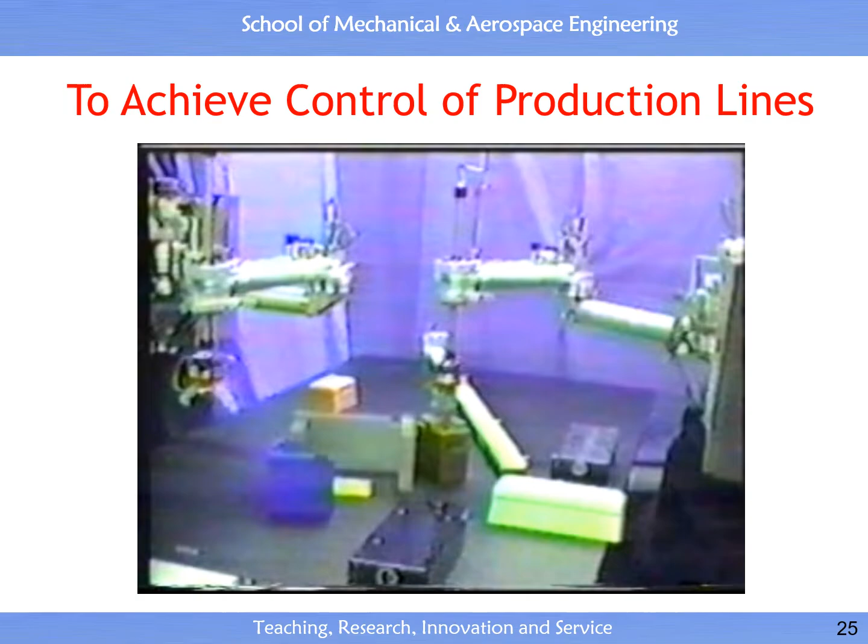The planner is aware of the kinematic limits of the arms and will plan regrasp operations whenever a change of hands is required. By relieving the work cell programmer from specifying all the maneuvers ahead of time, the work presented here can reduce the time required to set up a manufacturing work cell.

This video demonstrates how control primitives can be sequenced to address a variety of geometric and kinematic task constraints. All the demonstrations included in this segment are generated by activating three controllers.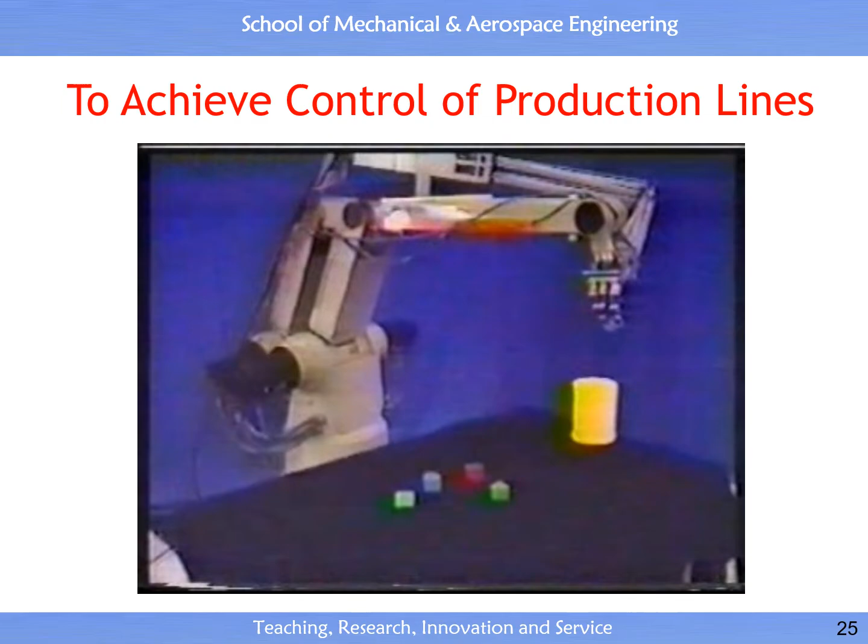One generates a collision-free trajectory in configuration space, another coordinates multiple contacts on C-space boundaries, and a third regulates the posture of multi-manipulator systems. These feedback controllers are bound to degrees of freedom in a control gait. Our conjecture is that such control structures can be somewhat device-independent, combinatorically tractable, and robust.

Here, a control gait composes these controllers to stabilize and rotate a task frame at the center of the spherical geometry.

Precisely the same control gait exploits the kinematics of the Utah MIT hand in a different fashion, yielding a new geometric gait to rotate a cylindrical object.

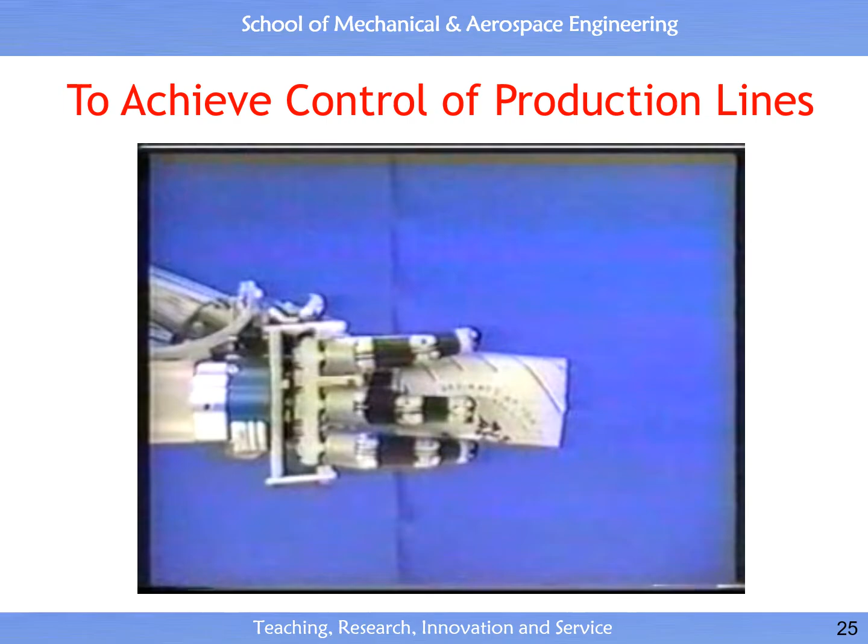By attaching the task reference frame to the robot rather than the object, the same control sequence can be used to stabilize the robot as it interacts with a planar geometry.

Using the same controllers, a walking gait can be constructed to translate the task frame while maintaining stability.

We are developing techniques that permit responsive, distributed control architectures to scale to complex systems and more general tasks. These examples illustrate one way in which a control basis can enhance robustness with respect to geometry and manipulator kinematics. Preliminary results suggest that this control structure dramatically improves the combinatorics of planning and learning in this domain.

Robot 2 is a hexapod with 3 degrees of freedom per leg. Each joint is driven by a 6-watt DC motor, and a potentiometer is used to measure joint position.

Proportional feedback position control is applied to each joint, wherein both the position set point and active stiffness are controlled by the locomotion controller. Strain gauges measure the axial load in the most distal segment of each leg.

Active compliance distributes the load more evenly among the legs as the robot attempts to maintain a stationary position but must react to external disturbances of the feet.

In the case of a relatively small lateral foot perturbation, the robot complies. This is achieved by reducing the gain in the proportional feedback law.

If the perturbation is sufficiently large, however, the leg responds with a stepping reflex, wherein the foot is repositioned to better support the body. Searching behavior, which has been documented for locust walking on irregular terrain, is included to help locate a foothold in case one is not found.

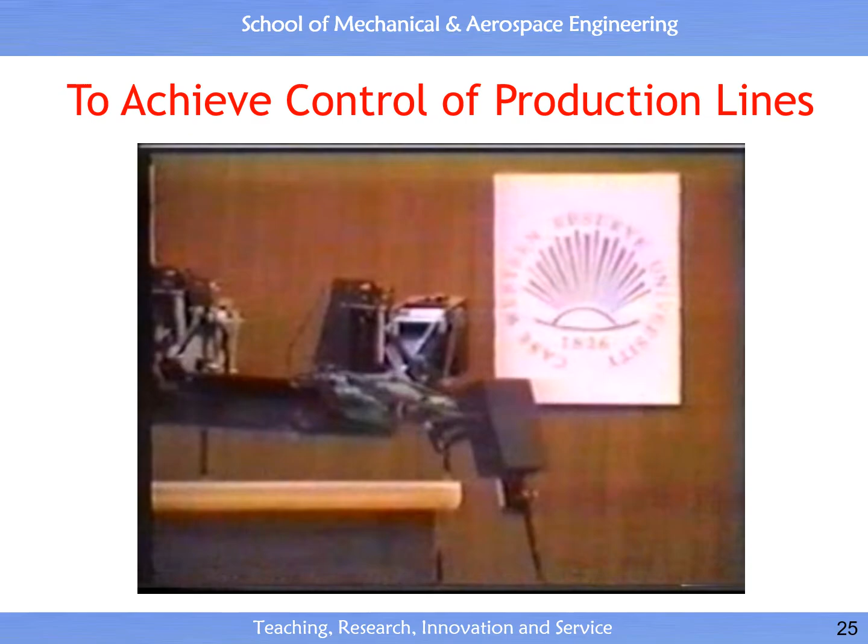The mechanisms thought to be responsible for the leg coordination of the walking stick insect were expanded to produce general walking on a plane, then used to coordinate the legs of Robot 2.

The robot walks in a continuum of gaits, from the slow wave gait, where one leg steps at a time, to the fast tripod gait, where the middle leg on one side of the body steps in unison with the front and back leg on the other side of the body.

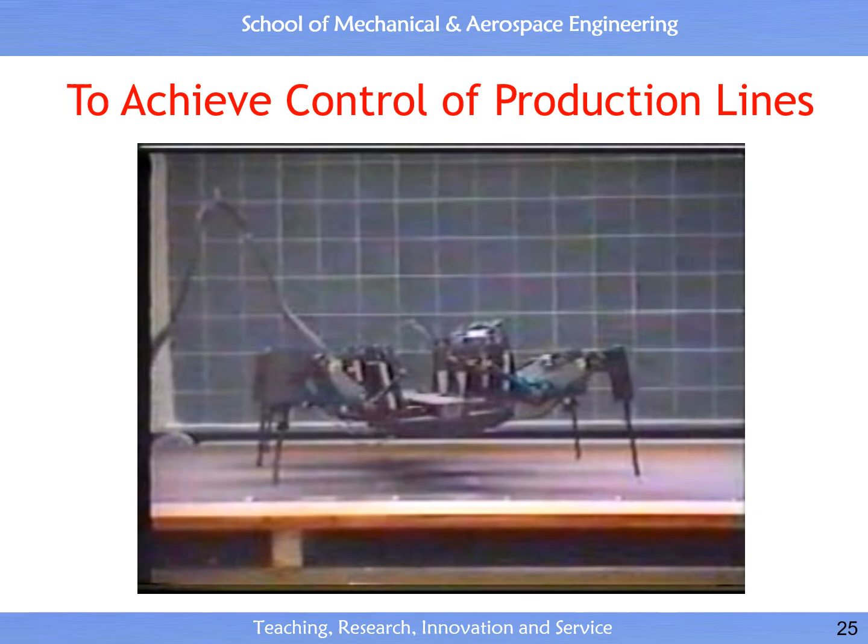The generalization of the stick insect mechanisms allows the robot to perform turning and crabbing gaits, as well as forward and backward walking, all without discrete gait transitions.

The gaits are not pre-programmed, but instead result from the dynamic interactions of the individual leg controllers in response to forward, lateral, and yaw velocity inputs.